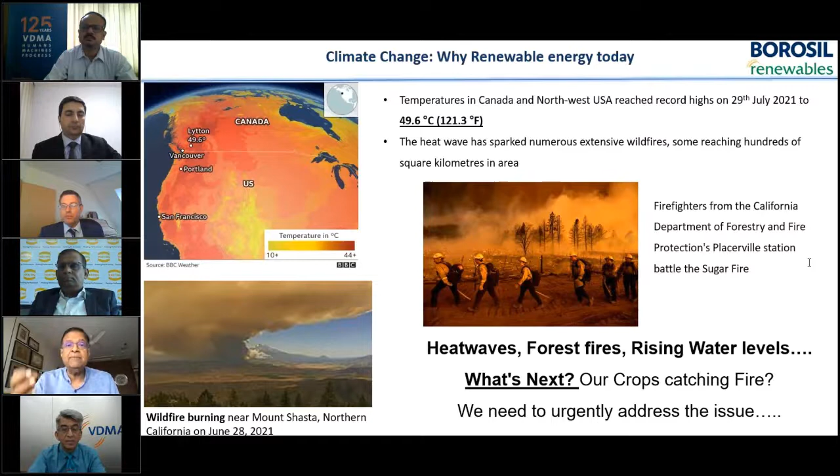So when we speak of the cost, there is a cost in terms of the natural wealth of the earth that we are expending in this sort of way. There's a cost in terms of our health. There's a cost in terms of pollution. All of these costs we do not always factor in. Then look at the way the pandemic has swept the world. Now, we may not directly link the pandemic with pollution, but the fact remains that with an unpolluted environment, hopefully spread of disease will be less, and people will be less sick. So that is something where if we can reduce our cost on healthcare, that itself would be a great reduction.

Then I come to the question of national wealth. You see, I don't have the slightest doubt in my mind that solar energy from photovoltaics has taken pride of place in terms of being the lowest cost, most easily installed, least demand in terms of engineering skill, fairly simple to set up.

Everything in the world which is generating energy must be handled with very great care, and I'm the last man to say that it can be done by simple electricians. I think it does need experts, but I believe that solar energy is what is going to bring relief to this planet in very large measure.

But solar energy is not everything, and we need to tap all forms of renewable energy, including wind, tidal currents, and any other forms that scientists might be able to deliver to us. We play a small role in this. We make solar glass - we are the largest non-Chinese owned solar glass producer in the world today, and we are ramping up production in India.

So these are some of the costs I was talking about: economical costs paid by nations, costs associated with depleting natural resources, and those associated with health. These are all very important costs that we cannot factor out. We just cannot keep thinking of euros and dollars and cents and rupees, but these are very important costs.

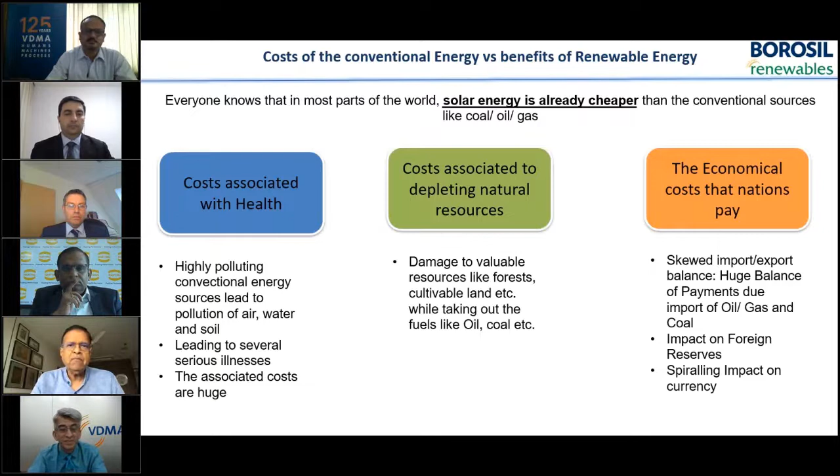The way I see it, this is going to be of great benefit. I speak from India, about India, because I'm familiar with India. I know that the installation of solar power, the production of the means to generate it - panels, cells, wafers, ingots, polysilicon, and other balance of materials required to set up solar farms - all of this creates an enormous potential to create jobs and upskill the youth.

We shall need an army of engineers to set up this whole infrastructure for manufacturing. In view of the fact that the world is awash with money, I feel that finances will be available to so many people who are able to set up their own solar power generation - I mean, talking of householders.

And with the advent of electric vehicles, I feel that the cost in each household today associated with buying fuel for running their cars is going to come down. Okay, let's forget about Teslas - let's talk more about Volkswagen style vehicles, which are general vehicles meant for city driving and things like that. The cost of production of these cars is going to be a lot lower.

Battery technology is improving a lot. The lithium ion used in batteries - I'm told by a gentleman who is the world's second largest producer of these batteries, he went to school with me, interestingly - so I spoke to him about recycling. He said lithium ion batteries are eminently recyclable without any loss of power. When you recycle a lithium ion battery, you can extract the lithium back from it and use it again to make a new battery, with no loss at all. It's much like glass, because we can recycle glass almost endlessly.

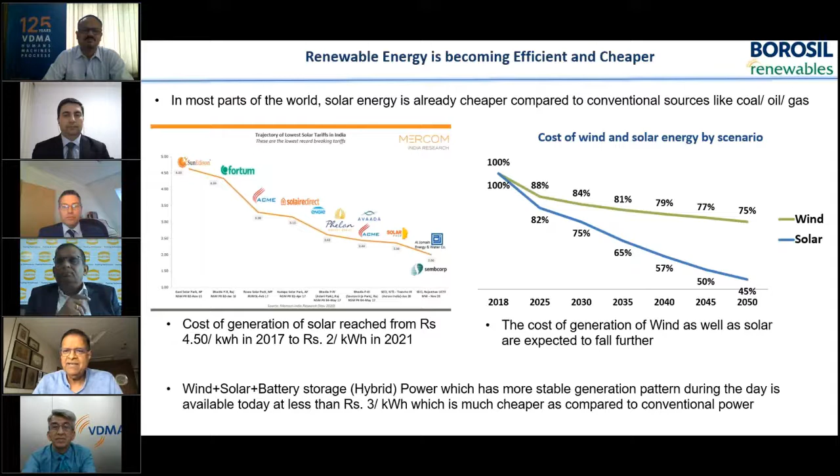So with these few words, I close my address, and I wish to thank you so much for having heard me. Thank you.

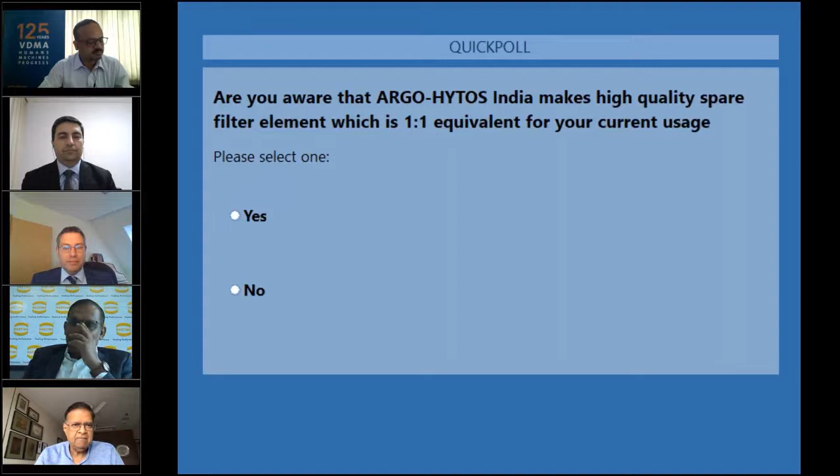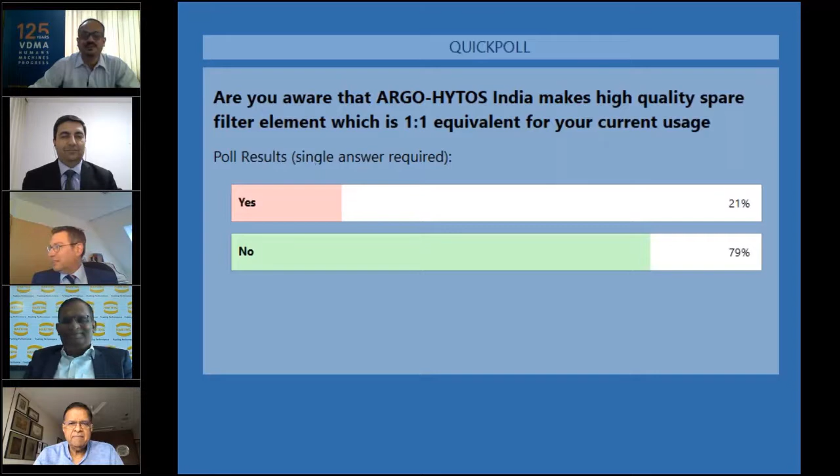Can we have the results, please? So it's a clear result: 79% is not aware, and only 21% is aware. So I invite Mr. Welbinger to change these statistics after his presentation. I think it will be helpful for the audience also to know much about it. So over to you, Mr. Welbinger, for your presentation on wind energy, ARGO-HYTOS expertise, and your success.

Thank you very much. I'm just looking for it. I'll just give you the controller. It does not work with my control. Maybe a little lag in terms of data, just wait for the timing. I have also lost your screen now. My screen is also showing the results. So Manohar, can you help us? I just see only the question. Yes, I also — I think my colleague is working on the back end actually. Just wait for a second, please.

Now I see your pictures again. I think we'll just give you the control. Here it comes in. Oh, it came and went again. So now it should work. I just put it in full screen mode. Perfect, okay, great.

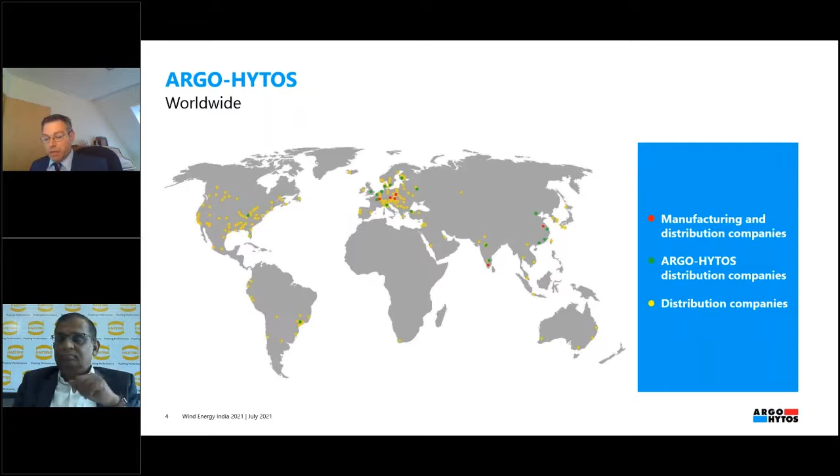At ARGO-HYTOS Germany, we have at the moment 450 employees. Everything designed and produced there has to do with filters, filter systems, filter elements, special plastic and hybrid technology for tank solutions, and sensors.

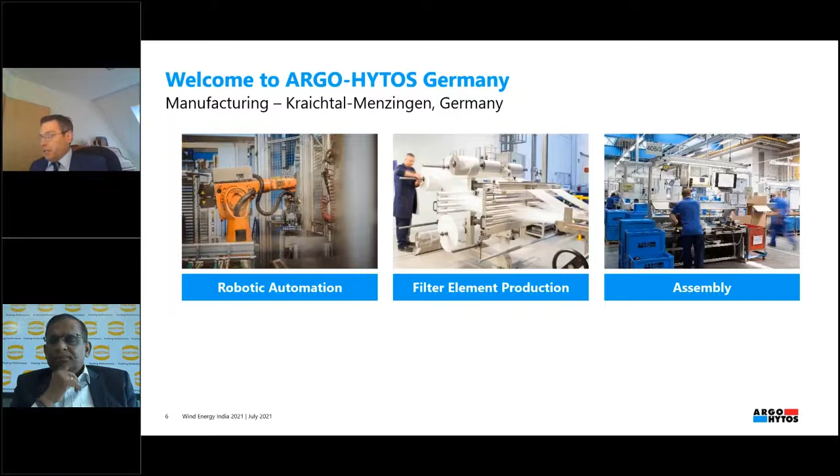We have a very modern robotic-supported production, with new filter element production and assembly. Looking at our product portfolio, we have at least everything needed in the hydraulic world.

Starting with suction filters, return filters, pressure and high pressure filters up to 600 bars and 1,000 liters, air breathers, clogging indicators - everything needed in the hydraulic world, and of course our core technology, the filter elements.

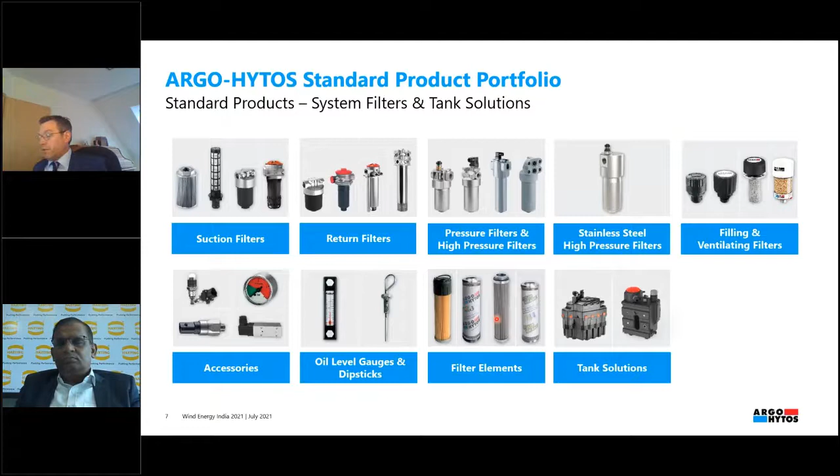At ARGO-HYTOS Czech Republic, we have at the moment 630 employees. Everything developed and produced there has to do with valves, manifolds, and power packs, beside our ARGO-HYTOS India facility, which I will cover in the following slides.

Also here we have a very modern, robotic-supported production. We have a lot of test and assembly facilities, and of course a strong quality management.

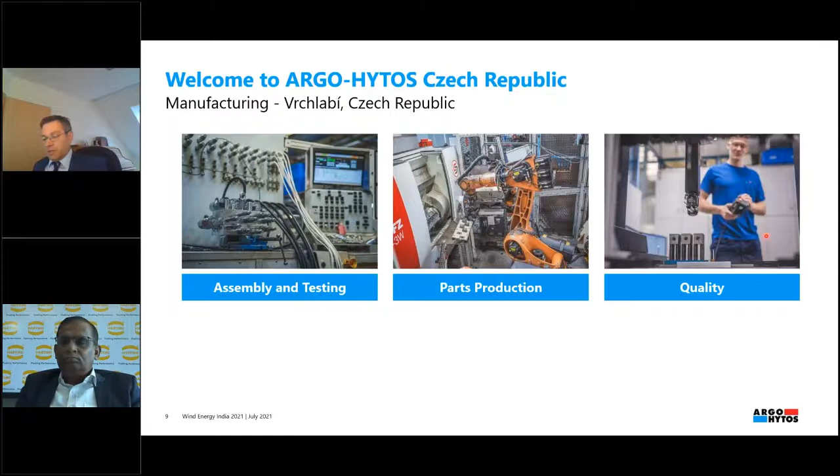The product portfolio I shortly want to show you: we have at least everything needed in hydraulic valves with different kinds and functions, including directional control valves, proportional valves, and valves in sandwich design, CETOP valves from size 4 to 25.

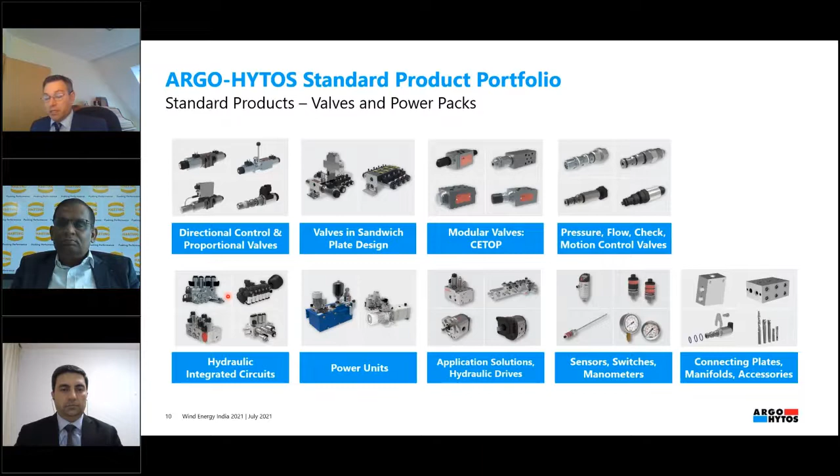We have cartridge valves, slip-in valves. With all these valves, we are able to design and produce hydraulic integrated circuits - customized systems for our customers.

ARGO-HYTOS Coimbatore is located in Coimbatore with about 140 employees. ARGO-HYTOS India is the center of excellence for filtration in Asia.

It's a global manufacturing hub for in-line filters, with design and manufacturing capability for both filtration and fluid motion solutions.

Our strong management team at ARGO-HYTOS India make sure that we can give the best support to our customers locally in India.

Also at ARGO-HYTOS India in Coimbatore, we have a very nice production area with filter element production, pleating machines, filter element assembly, and filter assembly in nearly clean room conditions.

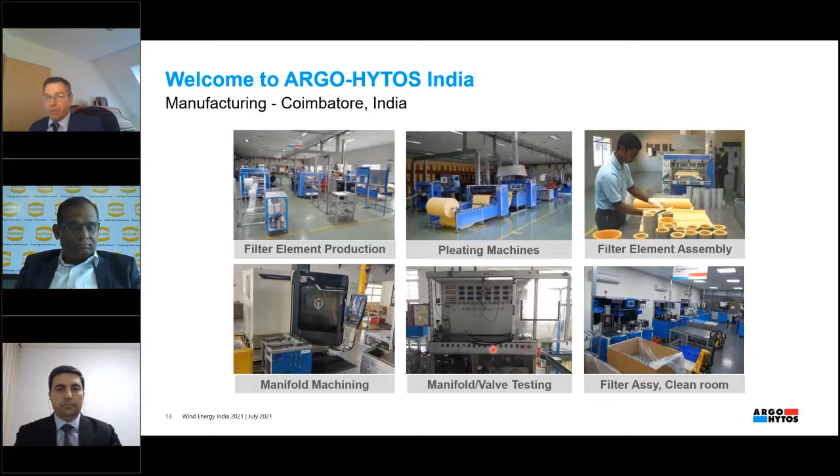We have manifold machining and, of course, a testing area where all manifolds and valves can be tested very well before shipping to the customer.

The design capabilities of ARGO-HYTOS India include at least a full-fledged design team. We have customized software we call PARO for manifold design locally. We work with a CAD system compatible with nearly all other CAD systems.

We have a very strong and close cooperation between our design team at ARGO-HYTOS India and our global engineering support team at ARGO-HYTOS Germany and Czech Republic.

The manufacturing capabilities are hydraulic filter assemblies, filter elements with different media and different filter finesses, some hydraulic valves, and of course manifold solutions.

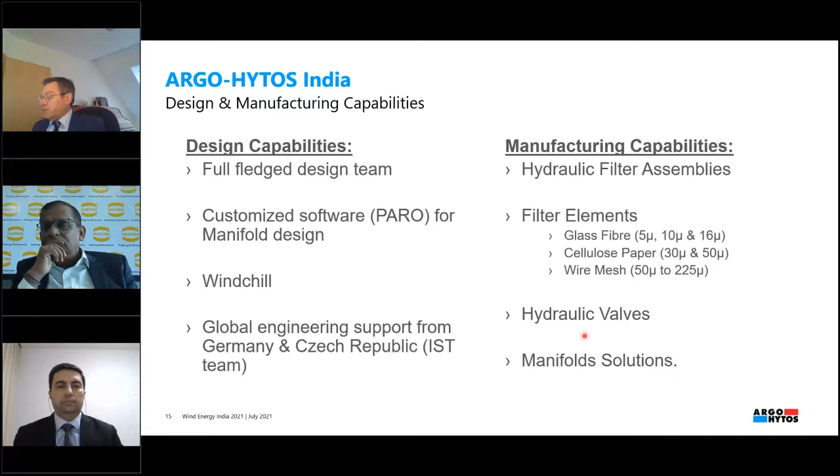ARGO-HYTOS India also has a strong distribution network over the whole of India. We have different sales offices and regional sales managers, which make sure we can give the best support to our customers.

Looking at the specific wind power application, ARGO-HYTOS India is similar to ARGO-HYTOS Germany, able to produce filter systems for pitch control and brake systems - suction filters, return line filters, pressure filters, high pressure filters - but also designing and producing lubrication systems for main gearboxes in wind turbines.

Starting with element design and a customized lube oil system according to specification.

This is a big part of sustainable engineering: making sure we engineer products with local sourcing and assembly to avoid long shipments of components from one continent to another. Also, the core business and core technology inside the filter systems will be developed at ARGO-HYTOS India for the India market. That means filter elements for the after-sales market, which we call Light Line. These elements fit all ARGO-HYTOS original systems, but also other brands, to make sure the spare part business from our customers is always covered.

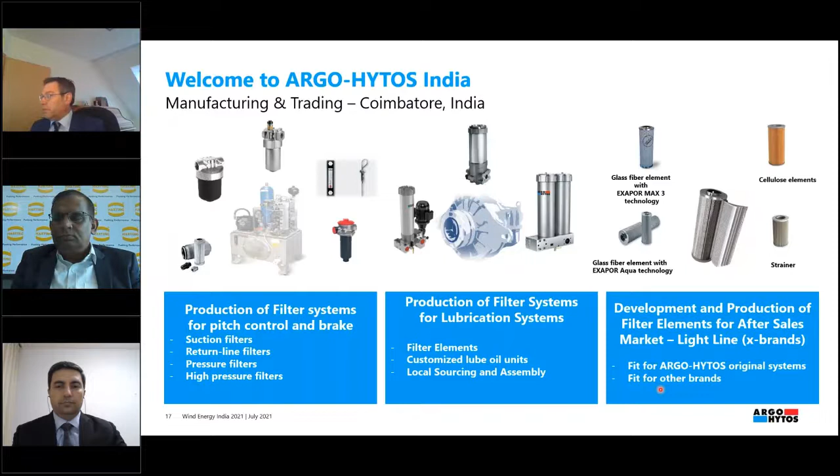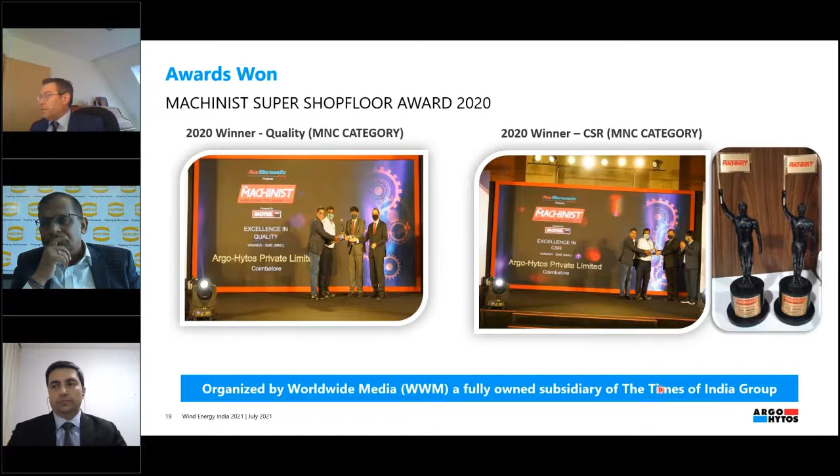When talking about products and sustainable engineering, we want to look at the different parts of ARGO-HYTOS products, starting with high performance filtration, which stands for high availability. ARGO-HYTOS develops in Germany as well as in India all the filter systems needed for pitch control and brake systems, beginning with suction filters, ending with high-end, high-pressure filters up to 600 bar and 1000 liters per minute, in many different versions.

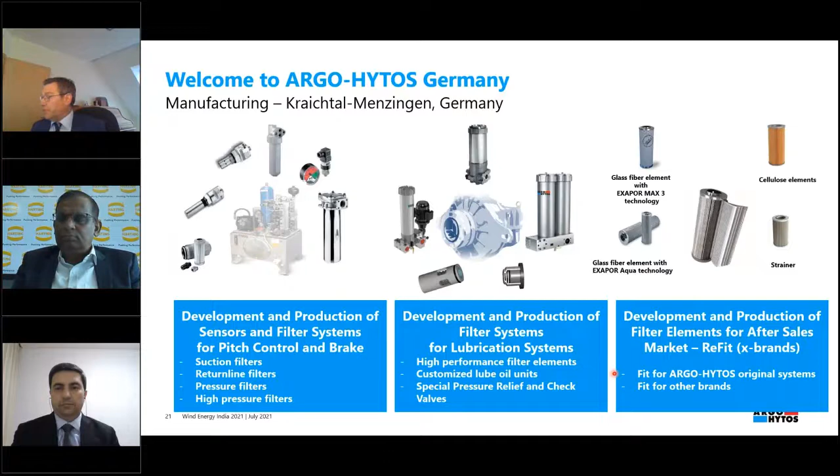We also have development and production of high-performance filter systems in lubrication circuits for main gearboxes, mainly customized lube oil units. Very special also are the pressure relief valves and check valves, which we designed especially for the windmill industry—I'll mention this later. The core technology are the elements we produce and develop for the after-sales market in different media, and these elements also fit ARGO-HYTOS original systems as well as other brands, ensuring the spare part business continues for our customers.

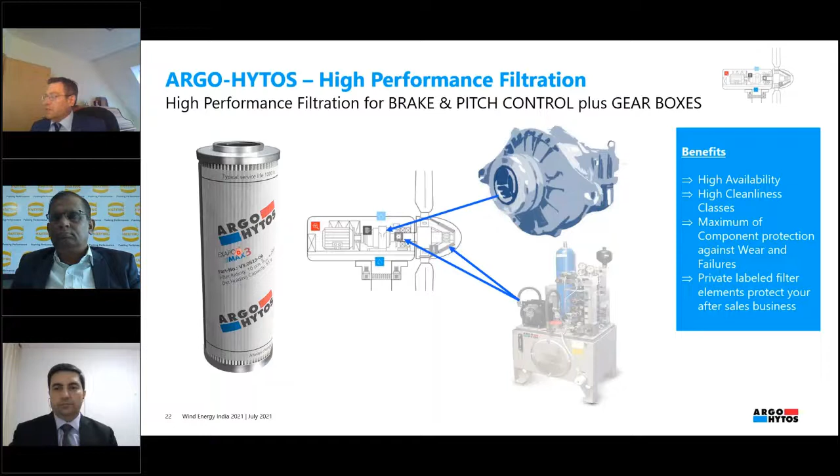To summarize the benefits of ARGO-HYTOS high performance filtration products: one point is high availability, which I want to explain a bit deeper. With our newest technology, we reach a high cleanliness class level every time, achieving maximum component protection against wear and failures. We also make sure the after-sales business stays in the hands of our customers, for example with private label filters—we can print the customer's logo, other information, a QR code, or whatever on the outside of our elements.

Looking at the high performance lube oil systems for gearboxes, there are several possibilities. As mentioned, we mainly offer customized solutions with more or less simple inline filters, but customers usually also demand functions like electrical motor and pump, plus some valve functions. This is one example for a 2 megawatt and a 3 megawatt turbine.

One of our highlights is also the most compact design of a lubrication oil unit or filter unit. It's possible to assemble the valve block, which is very compact, directly to the gearbox, avoiding any additional hoses or fittings.

Very special also is the design of our pressure relief valves. These pressure relief valves and check valves we designed especially for windmill applications, because the valves available on the market for this sector always have a very high pressure drop. With our valves we can avoid a high pressure drop, save energy, and so on—this is a special design we made for wind power applications, with spare part elements interchangeable to other brands as well.

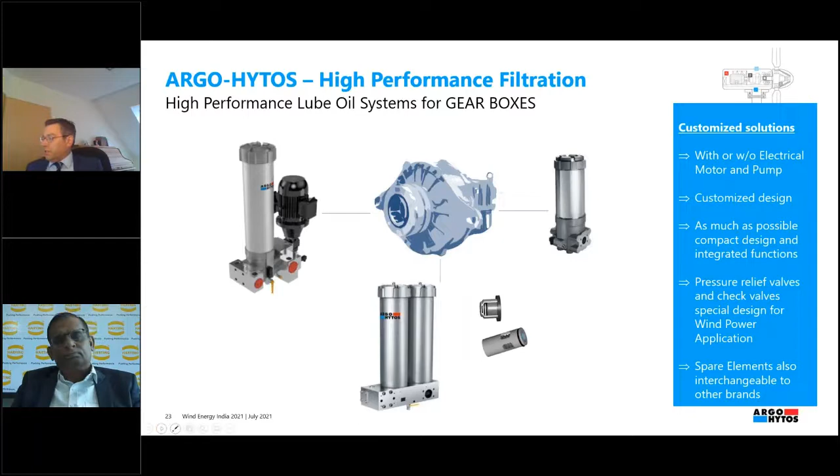Looking at the core technology of each filter system, we use the latest glass fiber technology from ARGO-HYTOS, which we call EXAPOR MAX 3. This new element generation was designed with the spirit of sustainable engineering—less pressure drop, high dirt holding capacity, and so on.

Beside our high performance glass fiber technology, we also use an innovative hybrid support fabric for optimized power density. The effect is that we increase dirt holding capacity while reducing pressure losses by up to 50%. What does that mean? Due to this optimized performance, we could extend service time, or—important for the spirit of sustainable engineering—we could downsize the filter systems of current running series products, avoiding the use of too much material and resources.

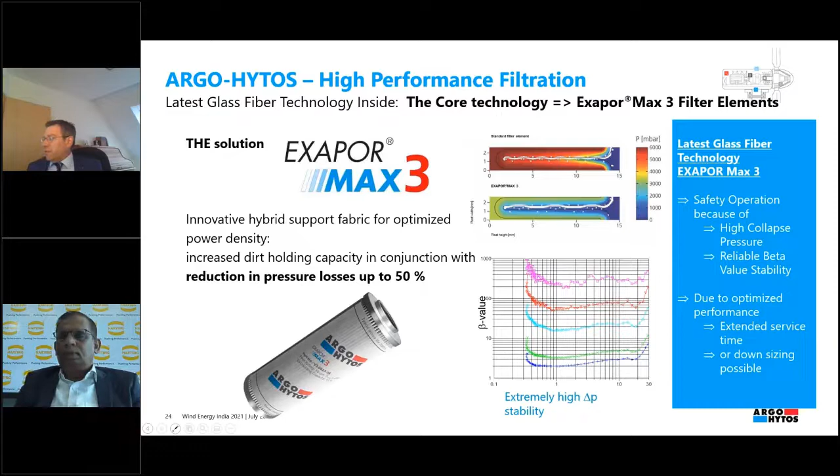So this is one point we would like to point out. Additionally, we have a safety operation with this newest generation because of a high collapse pressure and high reliable beta value stability shown here. That means an always stable filter ratio over the whole service time of the filter element. It is very important for the safety operation in each wind turbine.

Talking about motion control, motion control is standing in our world for valves. And talking about ARGO-HYTOS products, we are also talking about safety operation. For windmill application, we have at least all valves which are necessary for pitch control and brake systems. We have check valves, directional control valves, pressure control valves, flow control valves, special functions for pitch systems. We also have directional control valves with soft shift function.

We have certified pressure control valves. And last but not least, we have also a new generation of proportional valves, which can be used in that industry out of the catalog or customized. Customized means we can adjust the hydraulic and electronic interfaces and functionality to other brands.

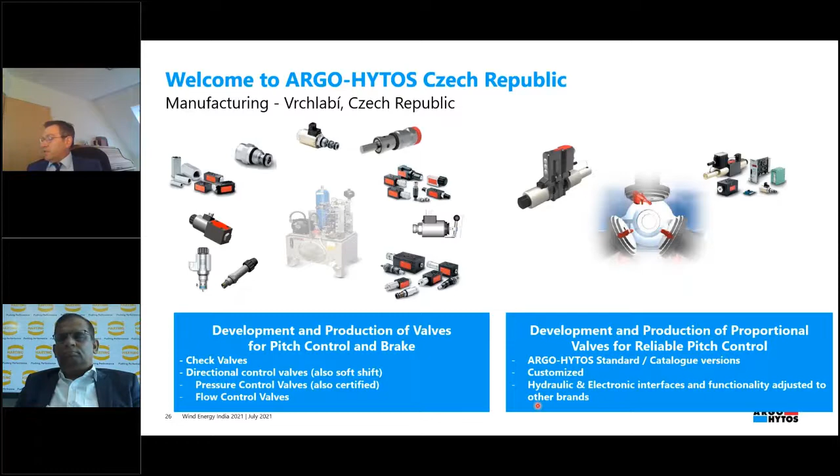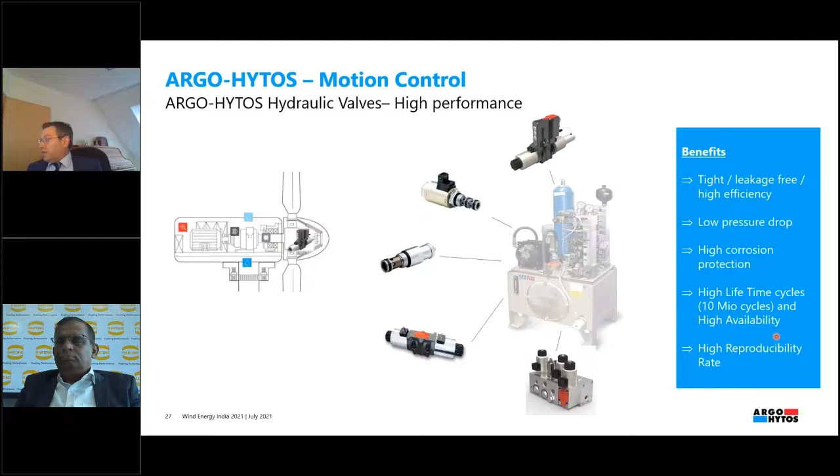The benefits of ARGO-HYTOS valves in general: they are tight and leakage-free. The low pressure drop compared to others promises high efficiency. Beside these benefits, we have in general high corrosion protection, high lifetime cycles guaranteed up to 10 million cycles, which means high availability, and the reproducibility rate is very high for all valves, especially important for the proportional valves we are using in the pitch control application.

Yeah, just to interfere, we have another three to four minutes for you. Yeah, please. You have another three to four minutes. Yeah, please. Okay, thank you. So, yeah, please. Thank you.

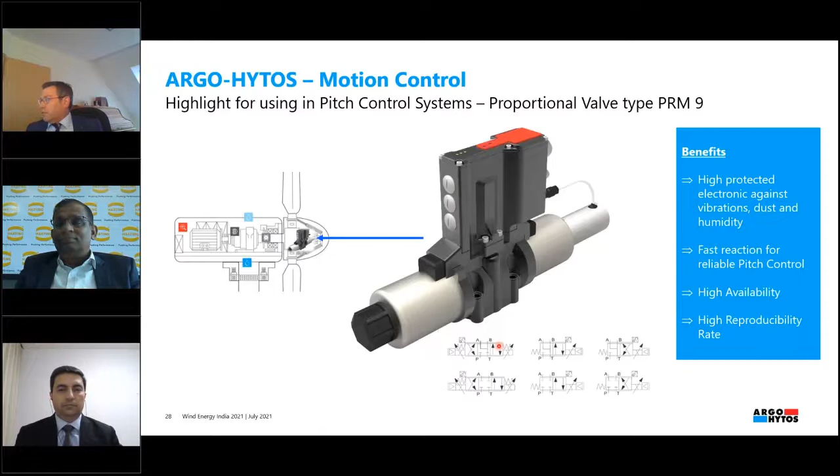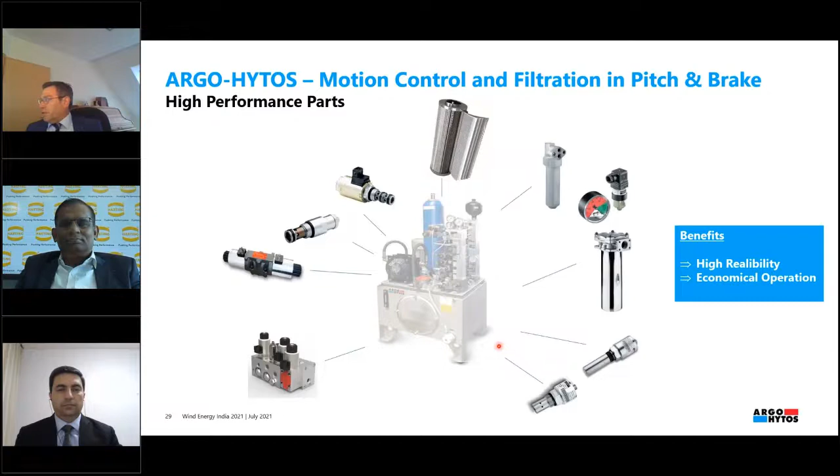High protected electronics against vibration, dust and humidity, fast reactions, and so on. I think these are the most important benefits for these kinds of valves. In summary, we can tell that the benefits of our valves and filter systems in windmill applications with our ARGO-HYTOS products are high reliability and economical operation.

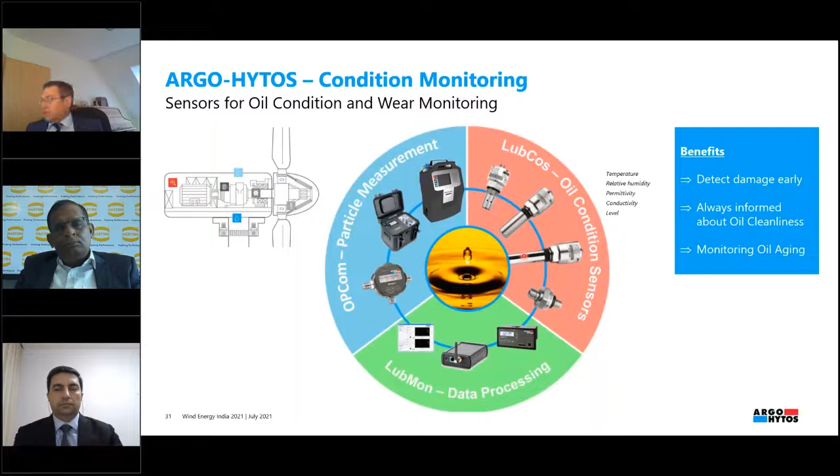On the red colored side, we have a very important oil condition sensor, or sensor for oil conditioning. This is used also in the offshore area, and these sensors help to monitor the oil aging process and optimize the service. This is also a kind of sustainable engineering, because these sensors help to increase the oil service time much. But that means the main motivation of condition monitoring is to reduce operation costs.

With the help of condition monitoring, that means avoiding unplanned downtime. We want to increase availability, improve planning of service measures, optimize spare part sourcing and stocking, extend machine service life, and increase safety for machine operators.

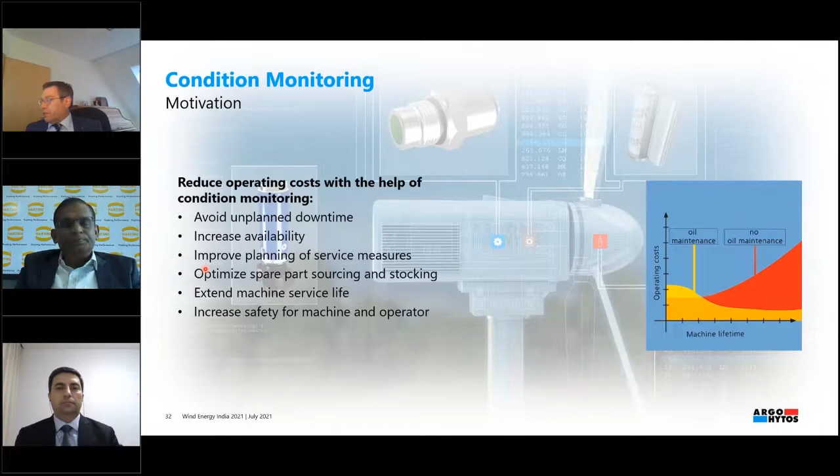And finally, we have economical operation because of high performance spare parts. Everything you have learned now is because of our OEM components like the proportional valves, filters, sensors, and so on. This is the same for the spare parts. That means using our ARGO spare parts is more or less a guarantee for a long service time.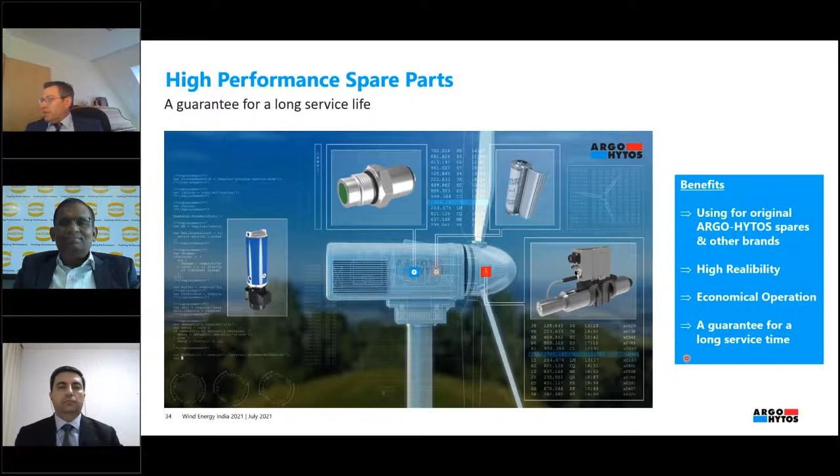So we would like to show you shortly, or finally, a short movie. Okay. It seems that it does not work. Okay. Could you? Yeah. Yeah, it's coming. Okay, great.

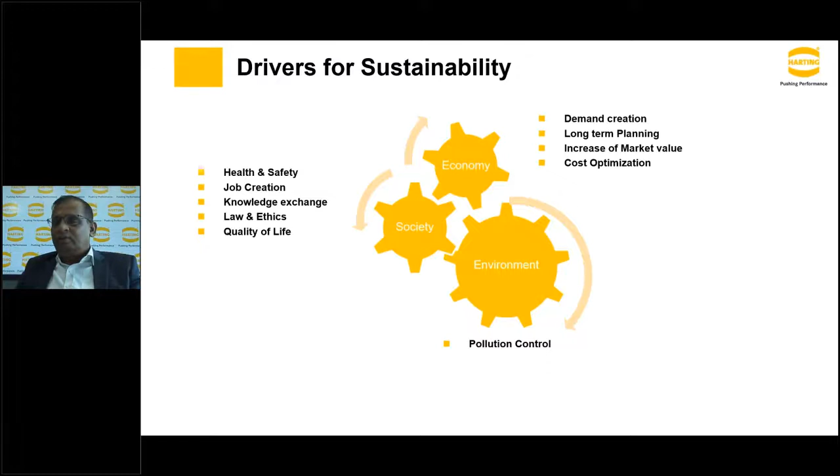The other important driver as far as HARTING is concerned - we consider environment to be a very important driver involved in driving the society and economy parameters. When I look at the environment part, we look at parameters like pollution control, which is very essential, and energy efficiency, which is very important today - one of the key parameters required and sought for.

And then we look at the carbon credits, and that's a very important part which all of us today, all the governments at a government level, or any customer requirements which they always talk about. This is something in the forums - they talk about carbon credits and process integration. We look at the different processes involved in achieving sustainability, and we look at a forum or platform where the various processes are brought together and integrated.

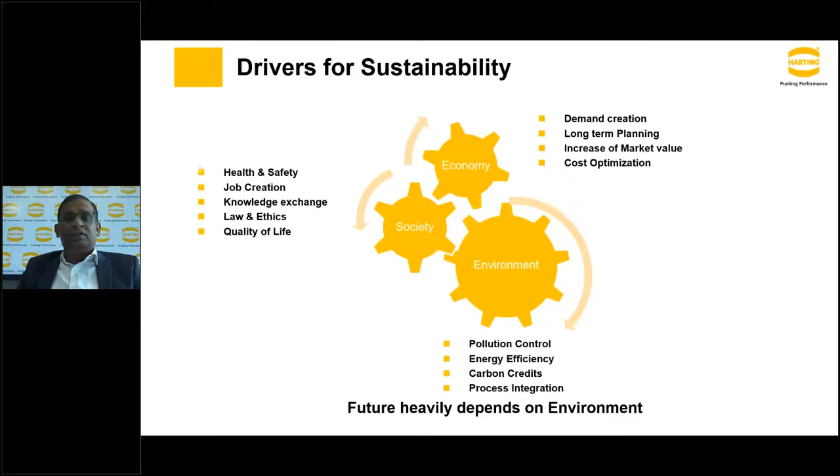So ultimately, the future as per HARTING is mainly dependent on environment, playing a very key role as far as achieving sustainability is concerned. Now, we heavily speak about environment, we stress about environment, and when you speak about environment, renewable energy plays a very vital role.

And why renewable energy? Because today, as my co-speaker was mentioning, some of the fires and hazards which are happening are affecting the environment and causing pollution. We find that renewable energy to a large extent could reduce and contribute to reduction of this greenhouse effect and greenhouse gases.

And we also look at a situation where the energy produced becomes more system resilient, and energy which is accessible to all, reachable not only to the urban part, but also to the rural and deep inside areas, and make it affordable.

And we look at renewable energy contributing towards the environment by combating the climatic changes, which again my co-speaker was reiterating and stressing about. And the most important thing is the energy produced could be at very affordable prices, because today what we are looking at is energy for all.

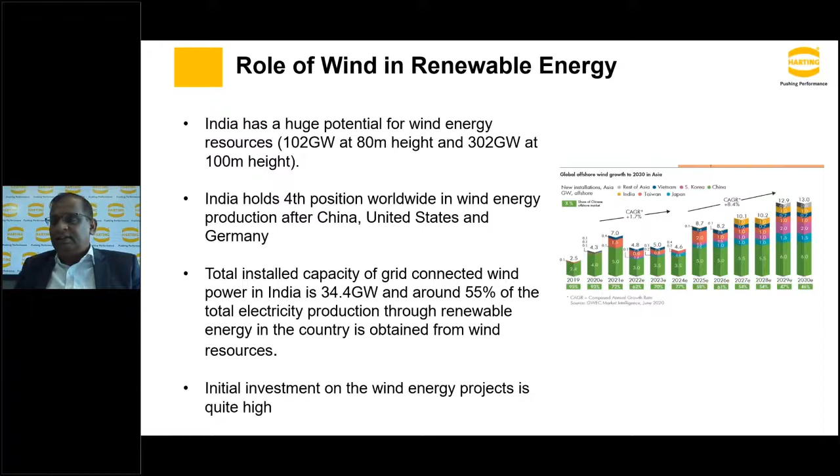Now, not to forget, the role of renewable energy today is also playing a very vital role in e-mobility. We at HARTING feel e-mobility is no longer a buzzword - it is definitely going to play a very vital role as far as India is concerned, with very ambitious targets. It is expected that we may beat China in terms of the number of vehicles we will be targeting to sell by the year 2030.

When we look at the sales of EVs and the contribution of various vehicle segments - 2-wheelers, 3-wheelers, 4-wheelers, buses or other heavy vehicles - EV would definitely help reduce the fuel cost, and the onus is on us to reduce the fuel import bill.

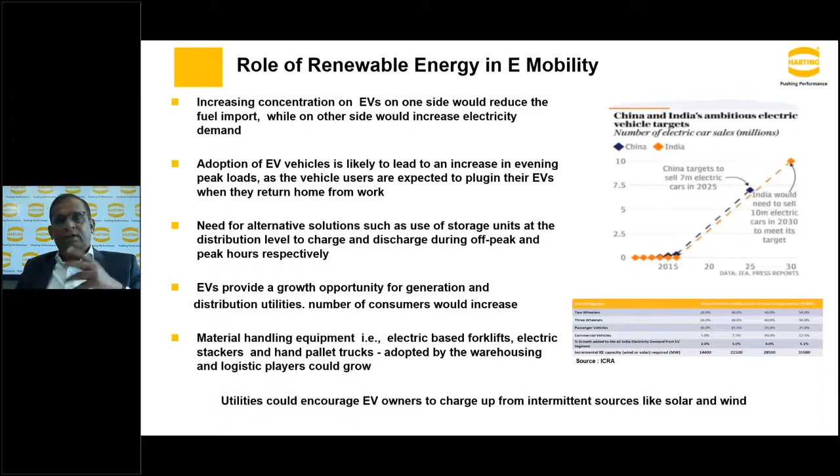EVs would probably be a growth opportunity for generation, and this would also be a good opportunity for equipment, probably material handling could also be taken care of. So what we are looking at is these utilities would encourage EV owners to charge their vehicles using solar and wind.

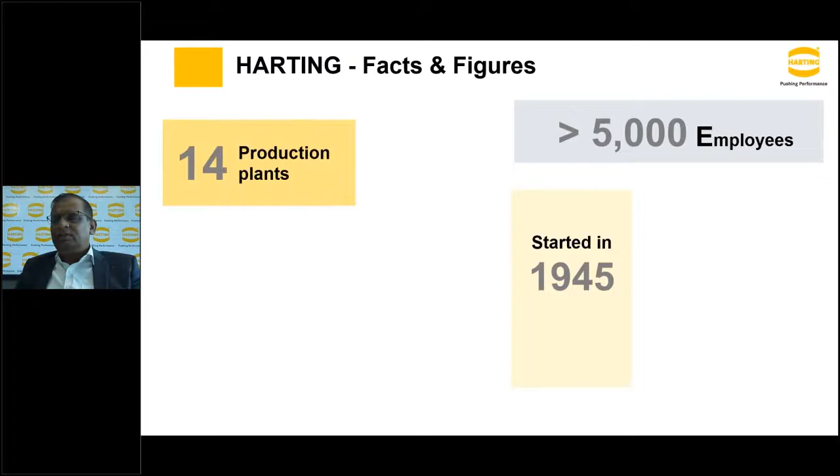We at HARTING are a company started in 1945, with more than 5,000 employees, 14 production plants and 44 worldwide subsidiaries, headquartered in Espelkamp, Germany. It's a 100% HARTING family-owned company, and we are the market leaders in connectors and connectivity solutions. Our production plants are spread all over the world, and as I sit here, we have our manufacturing plant in Chennai.

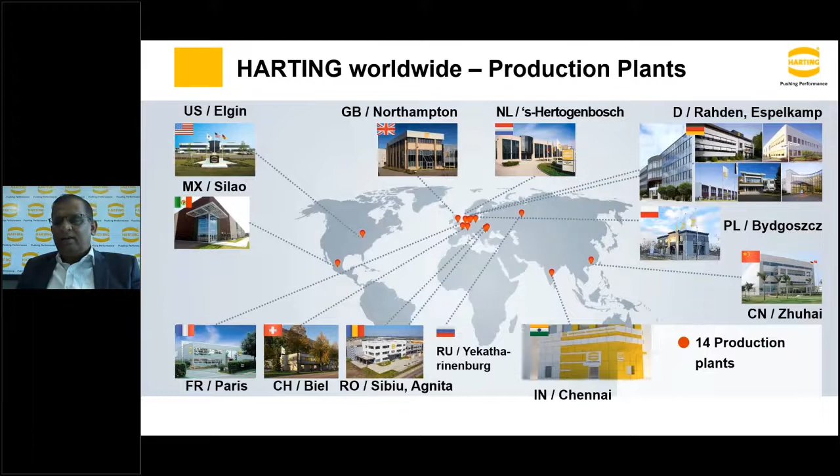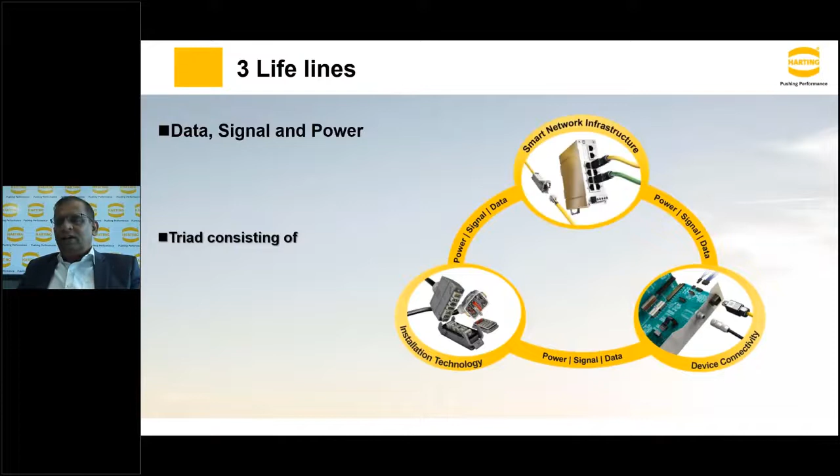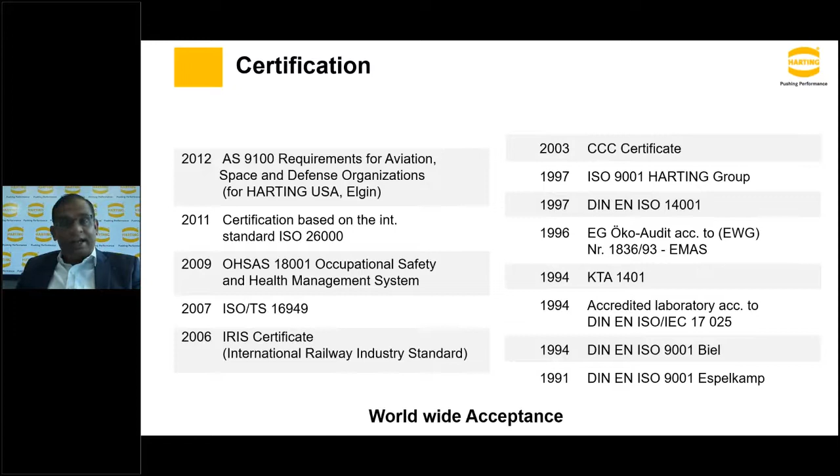Our lifeline is mainly data, signal, and power. We have connectors and connectivity solutions catering to these markets, and we are a well-known company in our field. We have been awarded various certificates and memberships by well-known authorities, and our company has received various other citations and certifications. Our products are certified by various standards, acceptable by various customers, and cater to different heavy-duty applications.

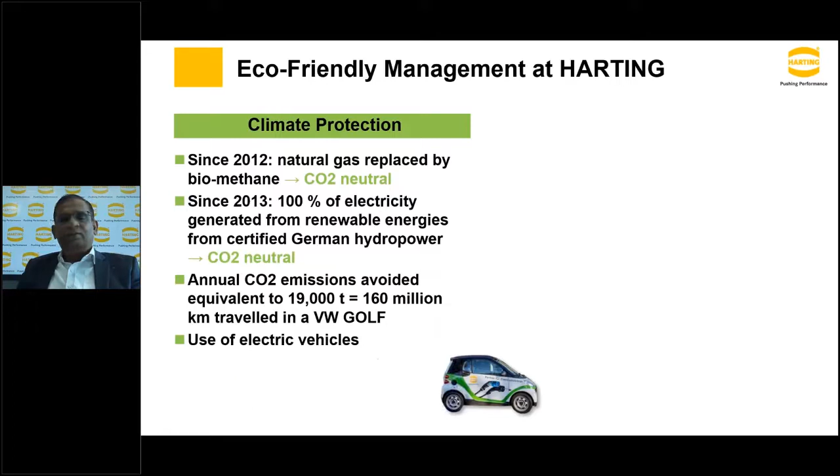At HARTING today we are achieving sustainability goals. We have not lost sight of this, and we follow the trends - we are planning for 2030. We have a very climate-friendly policy where we have our own generation. We use renewable energy sources to generate, and this renewable energy powers our own plants. Movement inside the plants is with electric vehicles, and in fact the government has awarded us for that.

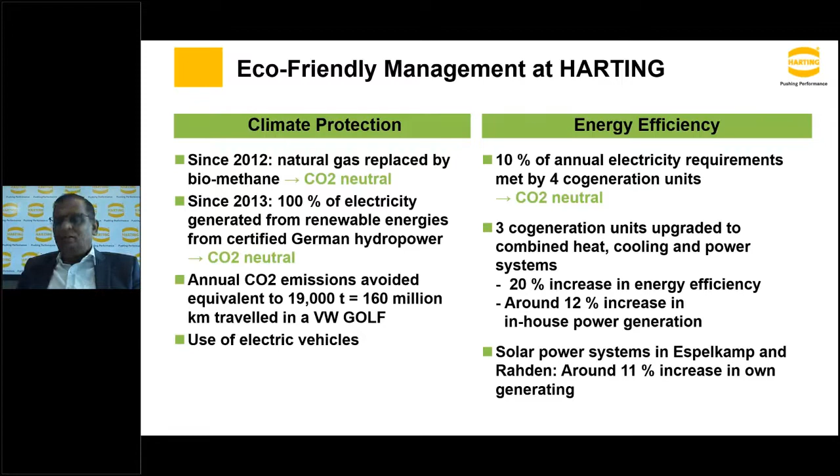Now, just to give you a glimpse of the application - the products which cater to various applications. As I mentioned, we are the market leader in connectors. We also have various solutions including cable harnesses and different types of solutions. We cater to solar applications with different types of connectors and sensors, current sensors, etc., offering it for solar applications.

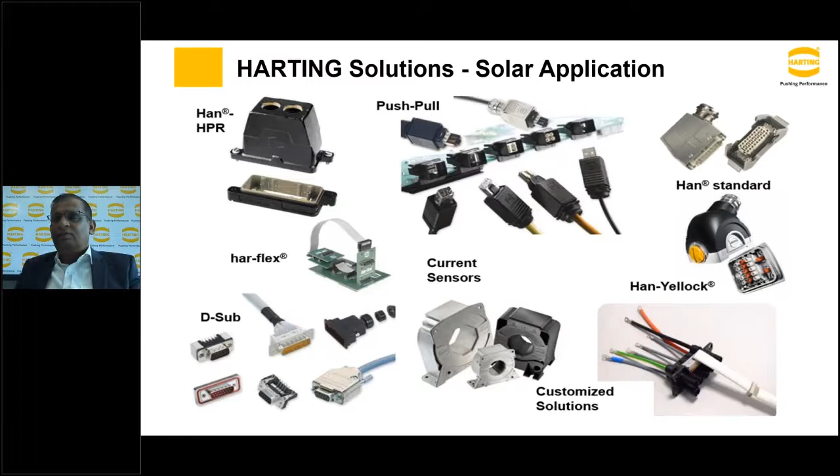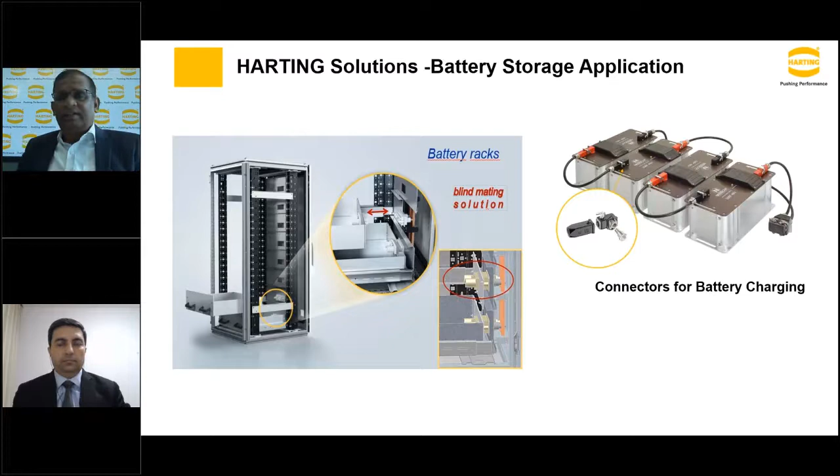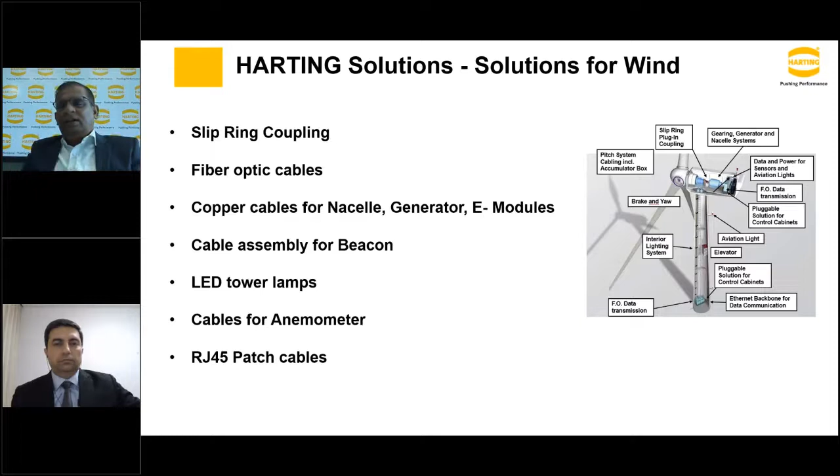We also have ready solutions for the blind mating concept in battery storage applications, with connectors mounted on the batteries suitable for charging applications - handling numerous charges and discharges, and exposure to acidic and other atmospheres. We also have solutions for wind power. Many of the solutions we've developed are the first of their kind. If you look at the entire windmill, we have solutions right from the bottom of the tower to the top, at every stage. These are some pictures of the assemblies and product components we offer for windmills.

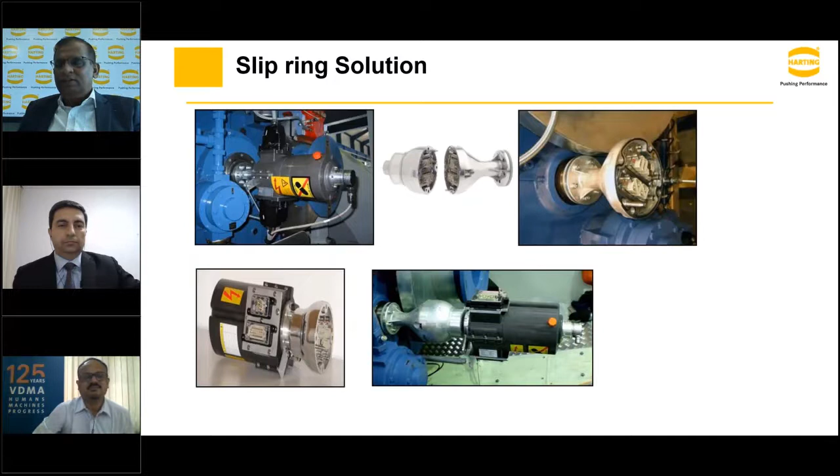Due to the constraint of time, I will not get into deep detail, I'll just run through this. This is probably the slip ring solution, which is unique and developed by HARTING.

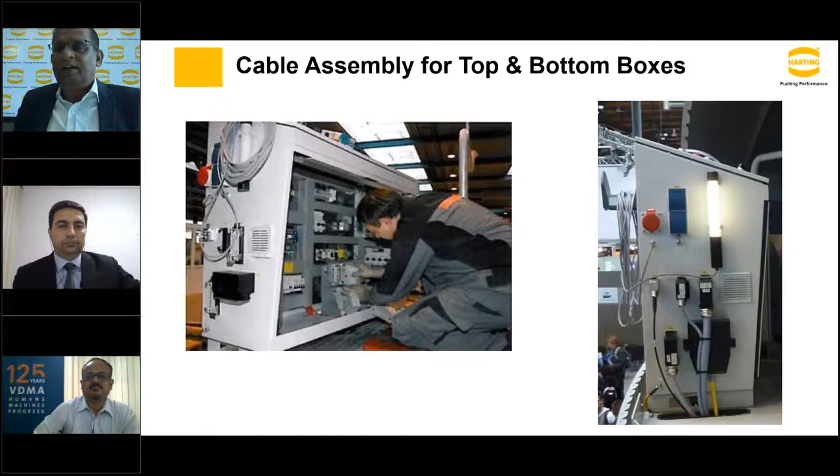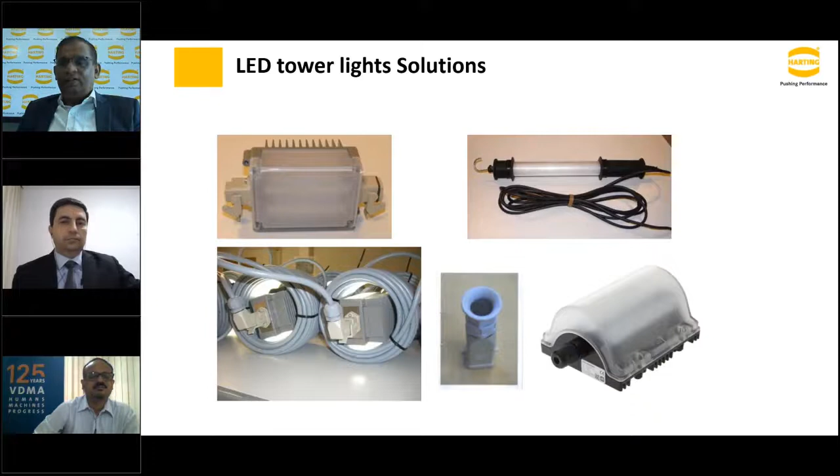Then we have the solutions at the generator level, the yaw motor level, the control panels at the top and bottom of the tower, the cable assembly solutions for the beacon lights, and the solution for the LED tower lights inside the towers.

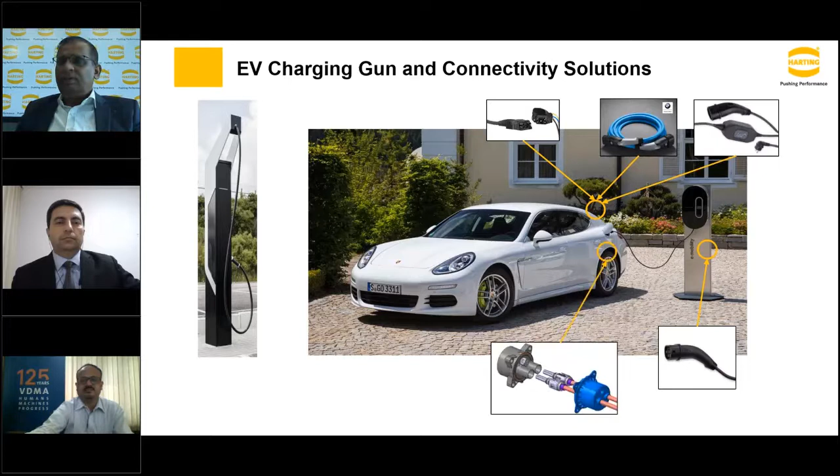Last but not the least, we are into the EV charging application. We offer charging for AC as well as DC. We have slow chargers, fast chargers, and the complete solution of charging guns for applications like cars, maybe two-wheelers, three-wheelers, and heavy-duty applications like trucks or buses.

So if you look at it, HARTING is complete with solutions, and the products and solutions we offer are sustainable. Sustainability is something which is inbuilt in all our products and solutions.

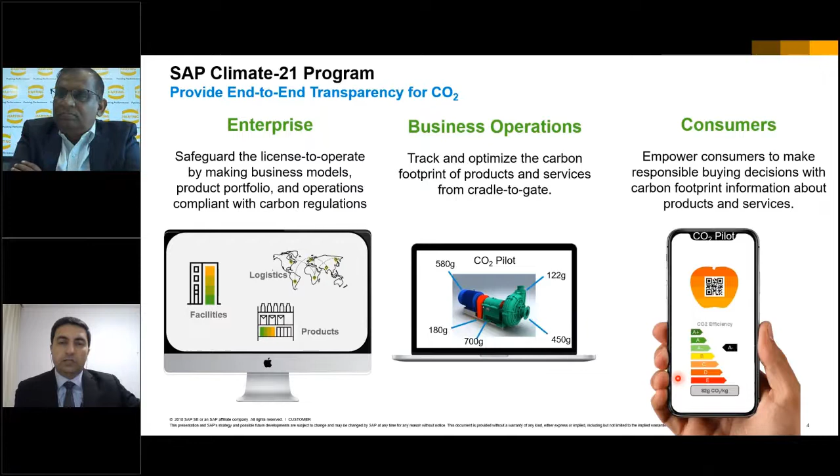We have also launched a program called Climate 21. It's about climate action for the 21st century and the SDG goal 13 that we discussed. We are following that goal, trying to provide transparency in terms of carbon dioxide and greenhouse gas emissions at the enterprise business level and operational level, and also in terms of consumers getting more information about products and their carbon dioxide or GHG rating. For example, in some countries electronic or electrical items have 3-star, 4-star and 5-star ratings. We are moving to support equipment manufacturers and consumer goods manufacturers in rating their sustainability or greenhouse gas emissions. This will become a big motivation for consumers to buy products with higher sustainability ratings.

So with that background, I would like to share some examples with you on what globally companies are doing in terms of digital and IT.

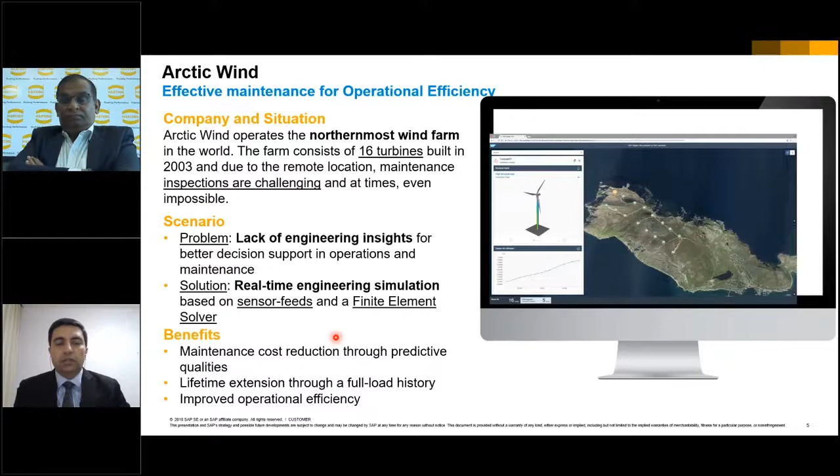So Arctic Wind, many of you may have heard about this organization. On this planet Earth, the northernmost wind farms are run, operated and maintained by this company called Arctic Wind. In their wind farms, there was no way to monitor the conditions of the windmills and remotely control their operations and maintenance. So with our help, they got the IoT sensor feed into the database and did a finite element solving program using SAP solutions to see how wind and weather conditions will affect the strength of the windmills and all the components available. This actually helped them reduce their maintenance cost and improve the quality of overall operations.

Then many of you may have heard about this company Dong Energy. They started with oil and gas and power businesses, but gradually phased off their oil and gas or fossil fuel businesses and now are mainly focusing on renewable energies.

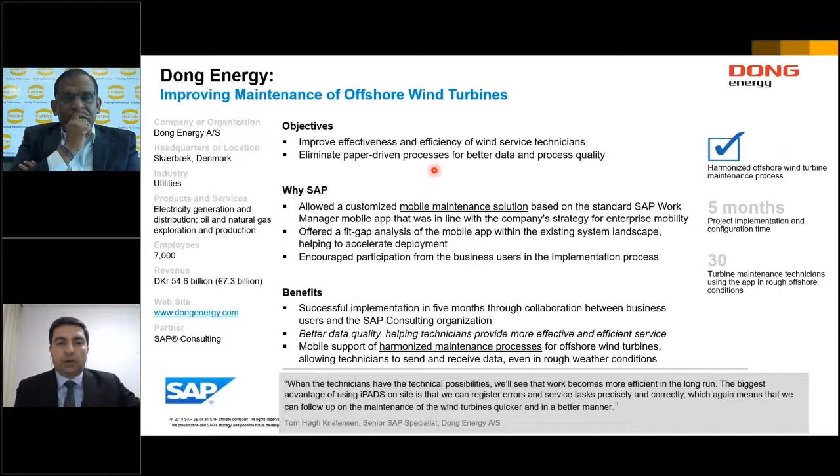Similarly, in their case, we helped them create a mobile-based maintenance solution so that technicians can carry all the information about equipment and the history of maintenance on their mobile devices. This is significant because it saves time from coming back to the office again and again to refer to engineering drawings, etc. Now they have the entire maintenance history on those devices, and they can do video calls with experts in remote locations, turn around the mobile phone or iPad to show the condition of the equipment, and get expert advice from anywhere remotely. This helped improve the efficiency of their maintenance workforce.

Then I would also like to share with you an example about EDF Energy. All of you know it's a very big company in the area of renewable energy as well as conventional energy. This is a classical example of IT and OT convergence - how they have integrated their information technology and operations technology using SAP solutions.

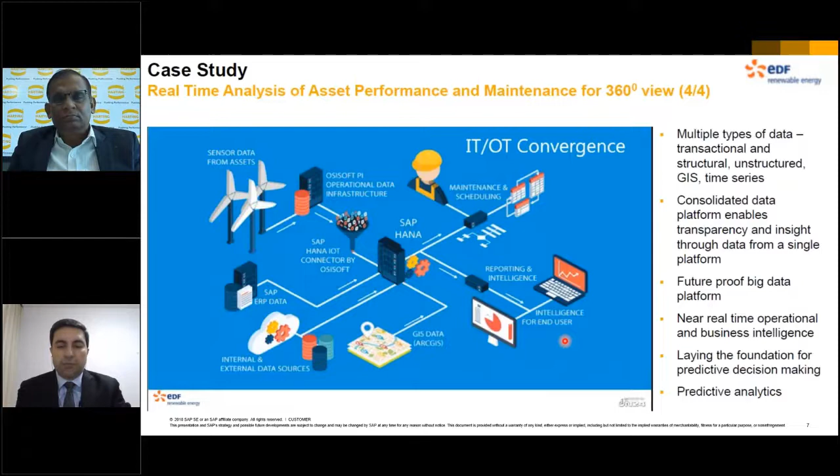Their objective was to have a unified business intelligence and operational intelligence coming into the same system. This has helped them generate various charts, histograms, and pictures, and really see on a geographical map the situation of their power generation sites, whether conventional or renewable—in this case, renewable energy sites like solar farms and wind farms. They can also do turbine comparison in terms of efficiency, uptime, etc.

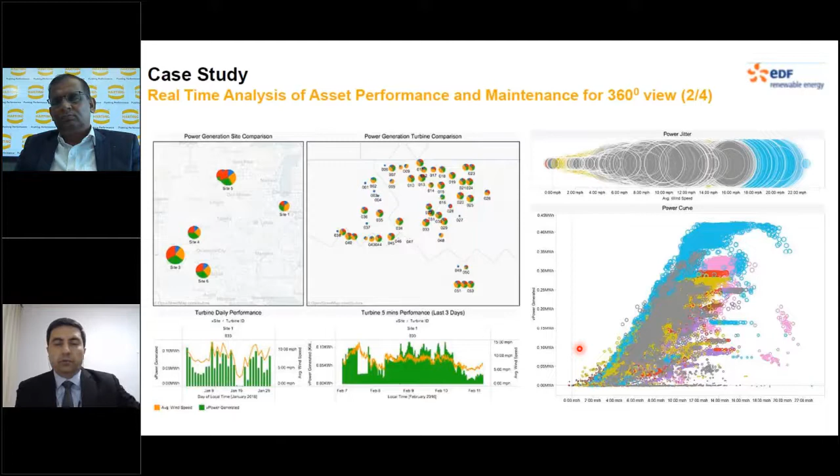With a lot of historical data analysis and time series data analysis, they can see how power generation has varied based on wind speed. These kinds of analysis have been utilized by them coming out of the SAP system. So there are many ways of analyzing data, benchmarking data, and comparing, all with an objective to improve performance and cost efficiency.

The last example is about Kaiserwetter. They are themselves not a renewable energy company, but they have established a platform called Aristoteles using SAP solutions. This platform is accessed by investment companies, investment funds, private equity investors, or banks, etc., who otherwise have no capabilities to view what's happening in those renewable energy projects where they have invested. This platform has been heavily subscribed by those financial companies as well as by the top managements of wind energy and solar energy companies.

What they do is provide the data gathered using IoT sensors, combine it with commercial and financial data, and provide a comprehensive dashboard with techno-commercial information. At the same time, they also bring in meteorological or weather-related data. So this big data management combined with very user-friendly analytics and dashboards is something which has been achieved by them.